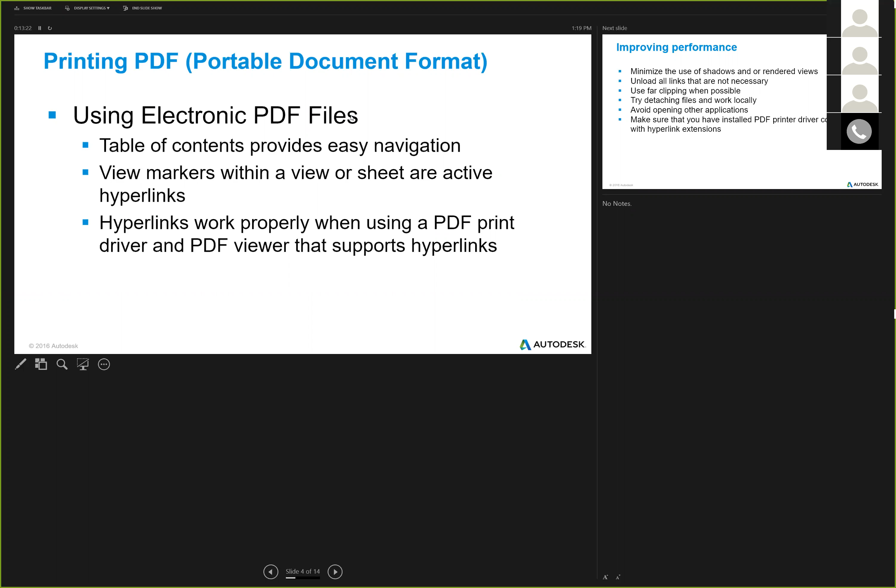To improve performance throughout the export of PDFs, you'll want to use a vectorized printout of the PDF rather than a raster printout. Not only for quality purposes, because if you do a vectorized printout you'll keep some of the information, but also the PDF becomes a searchable PDF.

When you have shadowed or fully colored views in Revit, Revit automatically converts that portion into a rasterized PDF. You want to unload links that are not necessary for the file, and also use far clipping when possible to minimize the information that's transferred or printed out to the PDF, rather than having the PDF print driver do the culling of the 3D model for you. You're actually doing it inside Revit.

You want to also detach files that don't pertain to the printing option, so the PDF print driver does not read through unnecessary files. This will enhance the exporting properties and make it quicker. Also, when doing export, I'd suggest avoiding opening other applications, because it diminishes a little bit of the production from the person exporting, but it will substantially eat up resources from your computer and slow down the process.

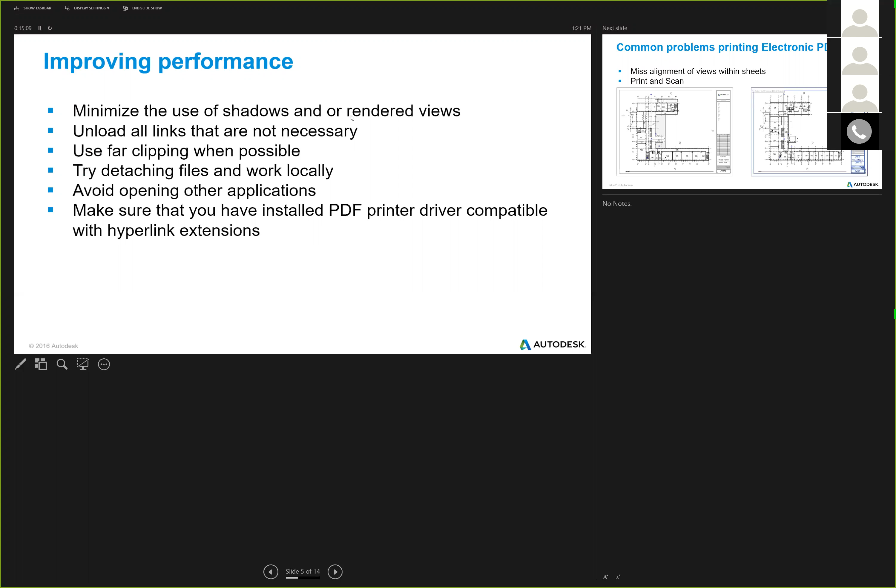If you're running Bluebeam and using the compare feature, sometimes it can automatically pick the alignment, but a lot of the time I had to use the 3-point alignment with Bluebeam, which becomes an issue when doing a batch comparison because you'll come up with a very huge array of results. The solution's not that complicated: if you set up ground rules and the architects and engineers coordinate a guide grid when producing their PDFs, they can align the grid lines to a specific coordinate within that guide grid in Revit.

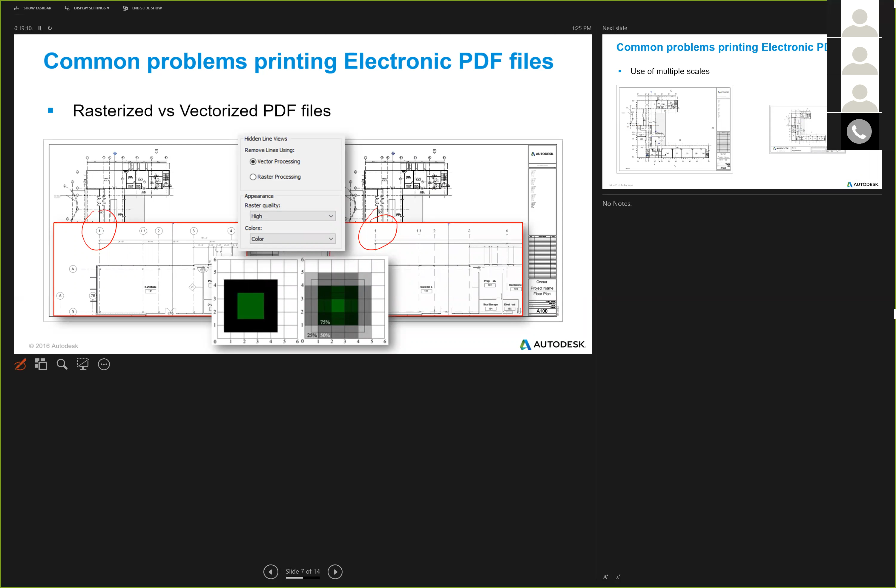Now here on the top, you've got the option when you're setting up your PDF print.

Ivan? Yes, sorry, can I ask a question? Why does anybody do raster then? What's the reason for it? Yeah, why is it even an option? If you want to rasterize the process? Yeah, like, if you're losing the quality, why would people want to do that? Does it enhance something else?

Usually I've seen this happening when they do renderings, when they have a lot of renderings on the PDF. Rather than going through Revit, doing the process to identify those renderings and rasterizing those portions, they rather rasterize the entire page.

Oh, so it's faster doing it with raster than vector. It's faster because you don't let the computer to try to identify the renderings inside the sheet, you rasterize everything. Make sense? Got it. That makes sense. Okay, cool. Thanks.

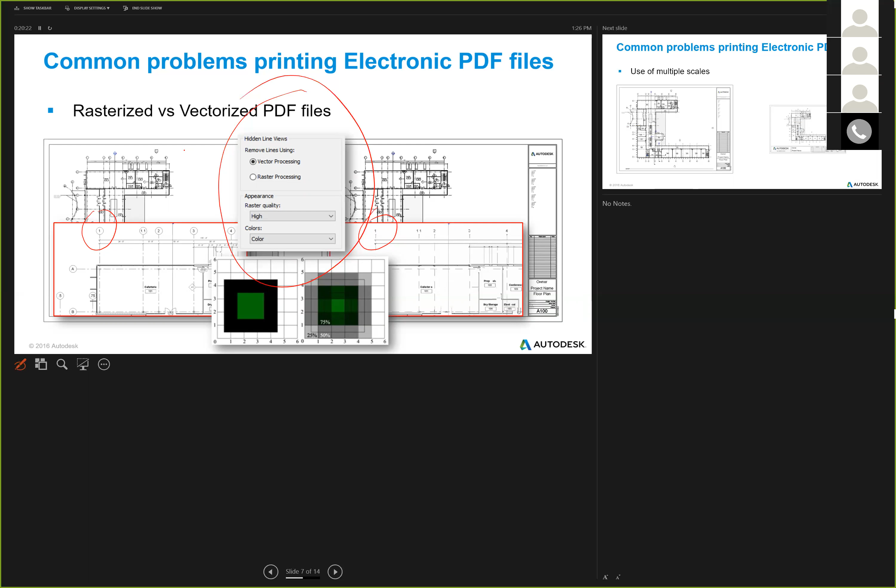All right. So another problem that I see happening, especially with subcontractors, when you're trying to do comparison, is that they tend to change the scale based on documents provided. Either they do a smaller sheet...

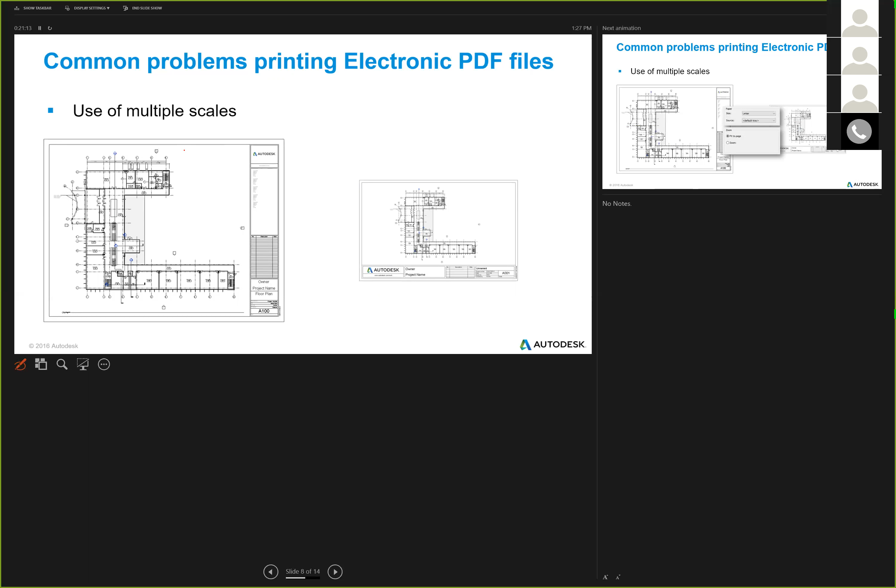You can actually fix this in the PDF reader writer by setting the scale of your drawings when doing comparison, but it loses its accuracy. Documents are not going to be set on the same grid, on the same coordinate on the page, which you will have to realign. And if you're doing a batch comparison, which is what you want to try to do in order to not waste time doing sheet by sheet, it diminishes the efficiency of the person doing this comparison.

So same thing, a lot of people, well this is back and forth, and this is probably things you don't want to see, people start using this fit page. And the reason for that is it's going to completely change the scale. You're going to have something where you're not going to be able to set an accurate scale on the page.

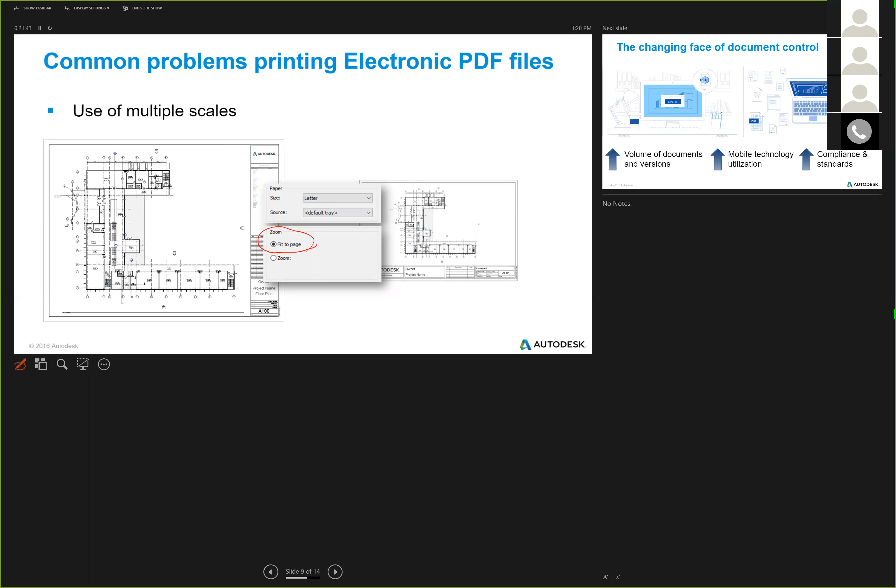All right, so let's discuss very briefly the changing face of document control. As you're aware, I don't know how many of you actually did paper documents back when everything was produced in paper and we didn't use PDF. You have the redundancy of printed documents, a huge number of sets, but eventually you had a little bit more control over what sets were printed. At some point, those sets were distributed through each party involved in the construction process. There was certainly a lag with regards to it, but now it's extremely easy to create sets.

You have a redundancy of documents. At the end of the day, a lot of the times when you're completing the project, it's hard to identify which is the valid set, or if you have a document that was issued, emailed, and it's not the most current version that you have on, let's say, your cloud server or on your local server where you're actually hosting the handover documents. So it becomes an issue, and I think you've experienced it.

Sometimes you have the final Revit file, or the final PDF file, or version 1, version 2, version 3, and you're trying to keep track based on a change in the name of the file that you're tracking. So that is a big issue.

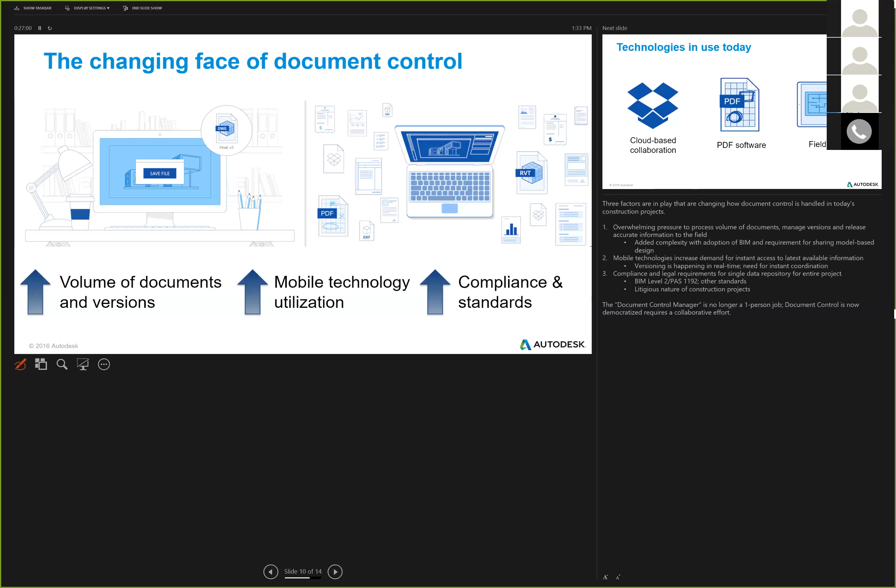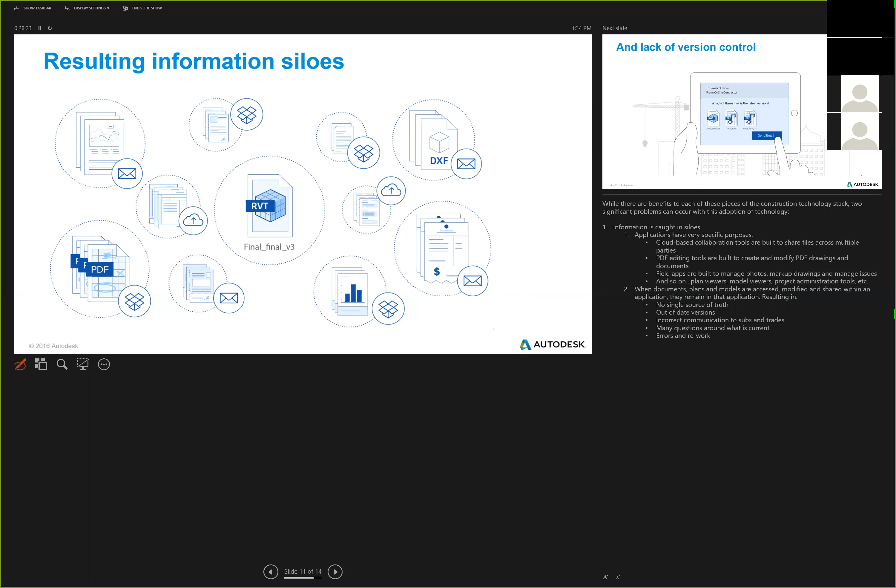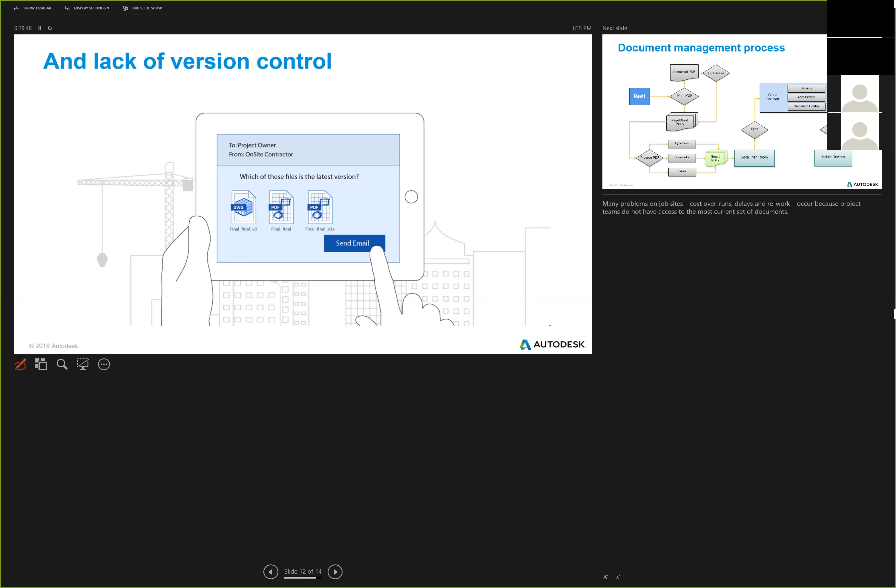So rather than having silos of paper that we had in storage rooms, now we're having silos of digital documents that are not truly interconnected, and you have a redundancy of documents that's becoming a true issue. As I mentioned before, one of the biggest challenges is being able to manage and control documents, the versions produced on every revision, who created the revised document, and when that revised document was produced. Now you have cloud services such as Egnyte or Box, which are actually able to manage and control those different versions.

I think I talked a little bit about what the issues are right now with regards to digital documents, and let me walk you through what we had at Balfour as a document management process. The process was initiated by the design firms when they produced PDF drawings from Revit.

And a lot of times, the PDF drawings that were produced were combined PDFs. Those combined PDFs were eventually exploded, and this was done by Balfour Beatty. We exploded the PDFs into single sheets, and from those single PDF sheets, all those PDFs were processed in order to hyperlink, to return some of the intelligence through doing batch hyperlinks. We used Bluebeam at that point, and Bluebeam had a great tool to do hyperlinks.

We generated bookmarks and labels to be able to connect all those sheets together. After we went through that entire process, we created what we at that point called smart PDFs. And from those smart PDFs, we loaded those PDFs to our local plan room, which eventually synced up to the cloud. And the cloud needed to provide certain features. And eventually, that cloud also provided access to sync those documents to mobile devices.

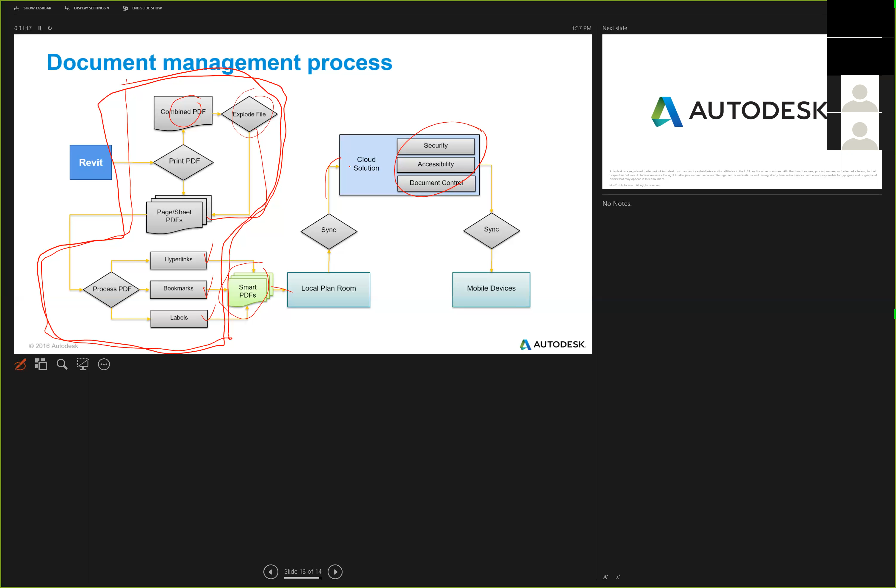So you can see every time you add a process, that process is prone to errors, and it did happen at one point or another. It was efficient, it was effective, but this was time consuming. So let me go through what I'd like to show you with Revit, with the R15 revised. Well, right now I'm running the R17, but it has the same features and capabilities.

When you print out a PDF from Revit, what you want to make sure is that you have the proper PDF printers. In this case, I have the Adobe PDF printer and the Bluebeam PDF printer set up here. Both are very capable of printing your documents with hyperlinks. So you don't have to go through the process of hyperlinking documents over again.

Now, it's also important to understand that there's also CutePDF that you can download, and it will also produce hyperlinked documents. But it's also important to understand that not every PDF reader/writer is capable of reading those hyperlinks. Adobe and Bluebeam, they do a very good job reading those hyperlinks.

In the case of Adobe, if you generate a hyperlink to map the document back to your computer or to your local drive, Adobe does read the file colon and the address that you're mapping within your drive. Unfortunately, for some reason, I wasn't successful doing that mapping through Bluebeam. It did not recognize the file colon and the address where the file was located on your local drive.

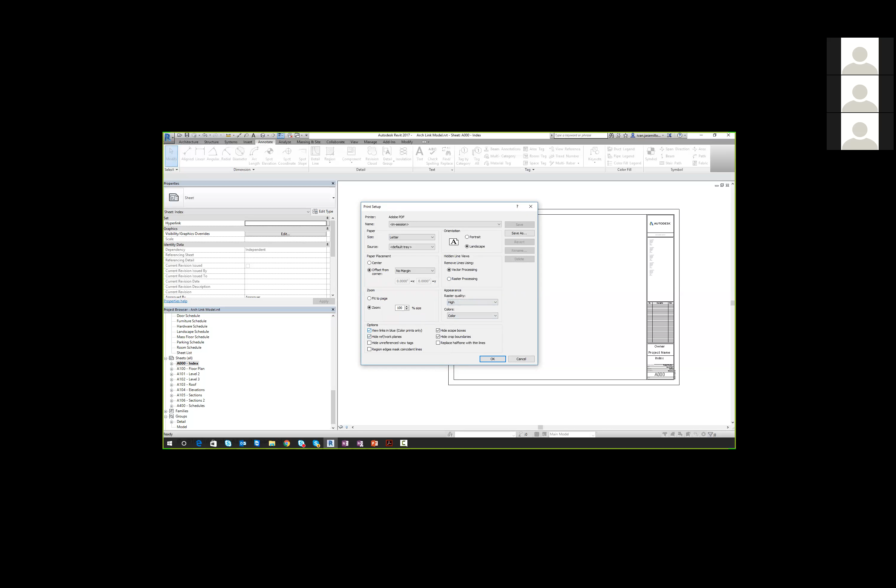And what I usually do, or usually did, is I enable this link. It's usually always turned off. It's view links in blue. It helps out identifying where you have those hyperlinks on the sheets. It makes it easier for navigation. All right. So I'm not going to export it here. I already had it exported. That way I don't waste your time waiting for this to process.

All right, so before I move out from Revit, let me very quickly show you, when you are organizing your drawings or your layout on a sheet, right? You want to make sure that, where's my, here. That either you create or generate a grid that you're going to use as a reference to be able to locate your file. And if the architect provides the same grid to their engineers, then everybody can use that grid to align specific grid lines.

And the purpose of this is that when you're doing sheet comparison, you can actually do a sheet comparison or an overlay of sheets with your architects, your structural engineer, and your MEP guys. And this becomes extremely important, not only to be able to coordinate with those different stakeholders, but also to better understand if you're looking at mechanical versus structural, and you're able to overlay both with different colors. You're going to see that in some cases you might find differences based on the level of completion of each one of those different releases.

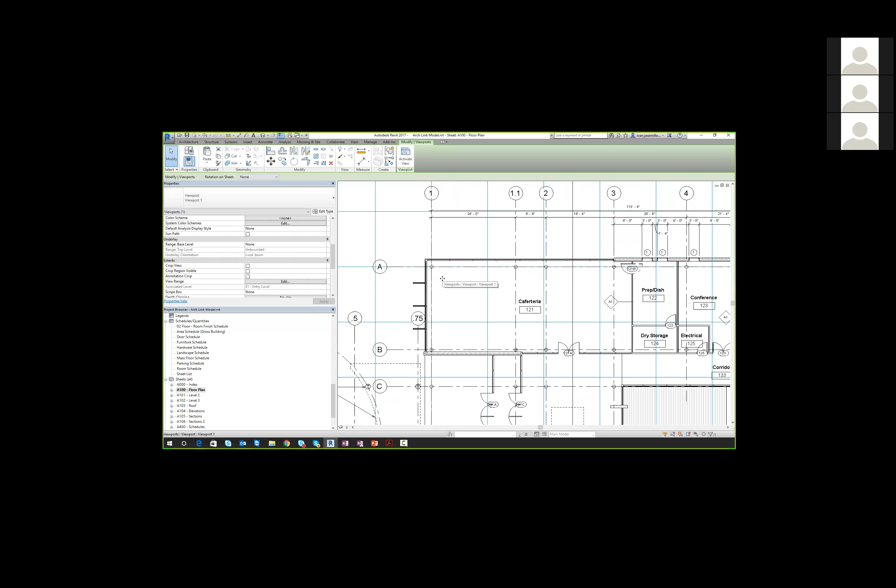And you'll find that sometimes the MEP engineer has a version that's a lot more updated than the structural engineer based on changes from the architect. Let's say they shifted a column and you don't see that column shifted on the structural side. It does happen. I've seen those cases where you have a more complete file from the mechanical engineer than from structural. So it's extremely helpful if you can coordinate with all of them to have the same base coordinate for drawings.

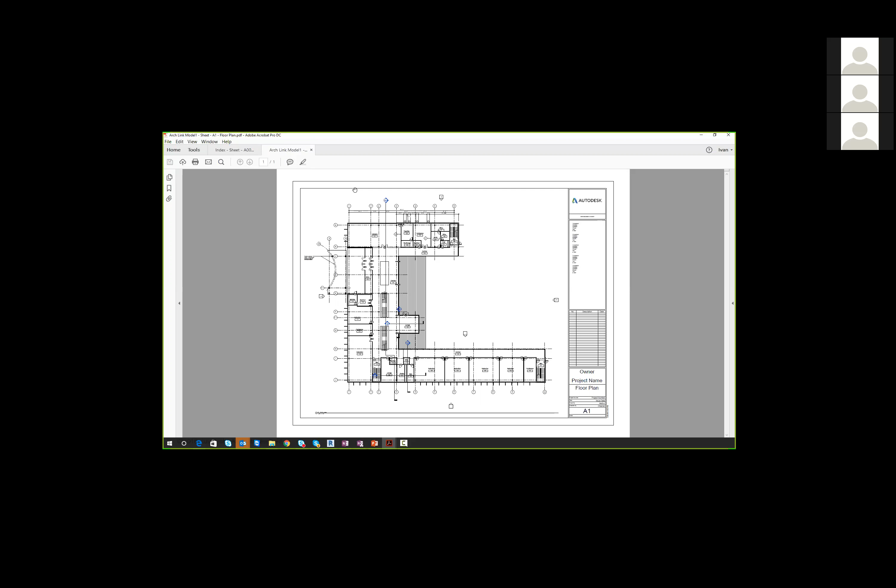So let me move into the PDF. All right, so this is exactly what I printed directly from Revit. I didn't do any changes or modifications, didn't go through a hyperlink process, I did a direct printout. And if you look at it, all those hyperlinks are active. It was generated directly from Revit. And if I click on each one of those, the hyperlinks are mapped back to the pages where they're created.

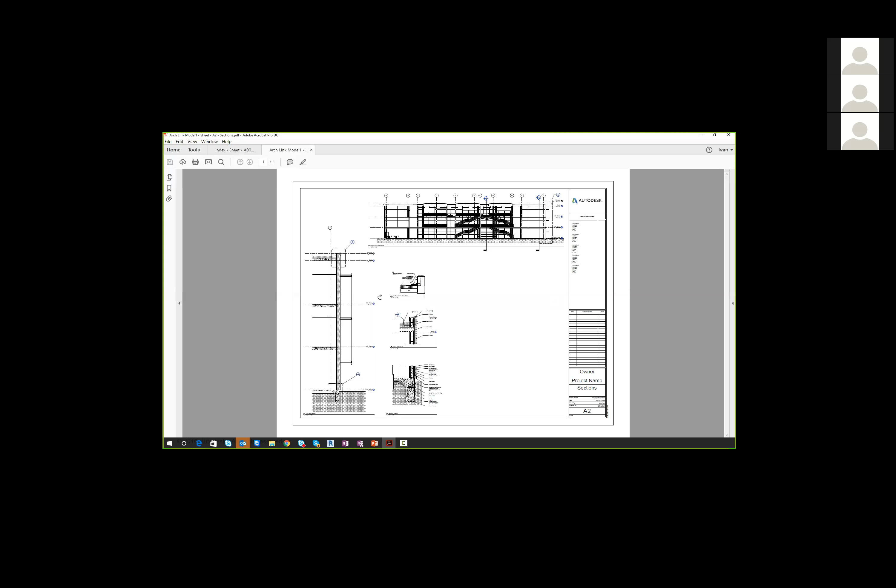And another thing, when you do the hyperlinking through Bluebeam or a PDF reader writer, or even through Adobe, I've in some cases used SmartUse that does the automated process of generating those hyperlinks. This does not create these hyperlinks over here, right? This was everything created directly through Revit, which makes it easier to navigate. Let's see. I'm sorry.

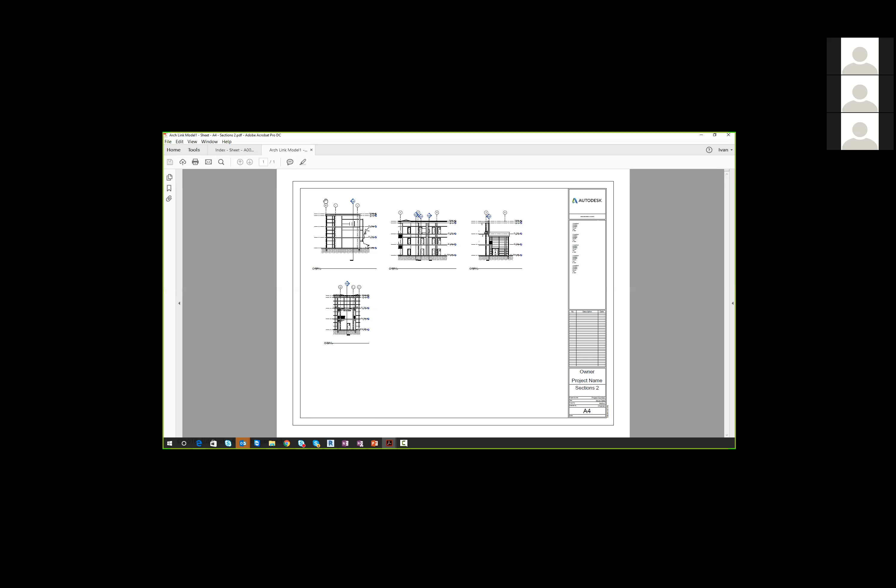Now, same thing with the index. Let me open up the index sheet. This is also a very short example that I wanted to show you. Through Revit, if you look at this, this was created as a property inside Revit. You can actually shorten and automate the process of generating these hyperlinks. In this case, I just did a copy paste of the hyperlink directly from the cloud service that I was using. In this case, I was using OneDrive. These hyperlinks were created through Revit, and when exported to PDF, it retains those hyperlinks. And this is the same thing.

Unfortunately, for some reason, this is something that I didn't find to work on Bluebeam. It does not recognize this type of link. On the other hand, Adobe does recognize this as a link. So if I click on any of this, all right, let me move this. It appeared on the different screen, so let me grab this so I can show you. So it's going directly to the cloud service, and it's searching for that sheet, and it opens that sheet directly.

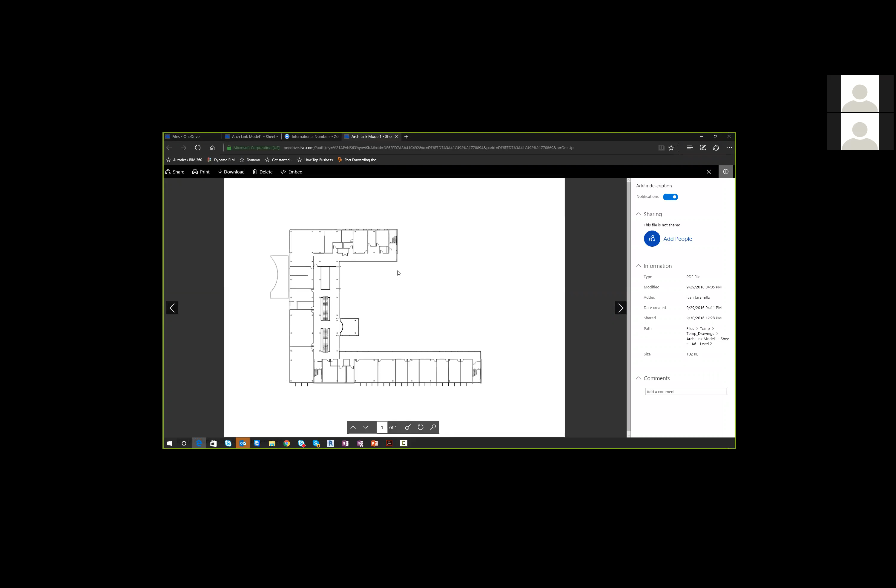So if you're using a specific cloud service, you can generate those hyperlinks, provide access to it, with a password if you want to set one up, and that link can guide you directly to where those hyperlinks are.

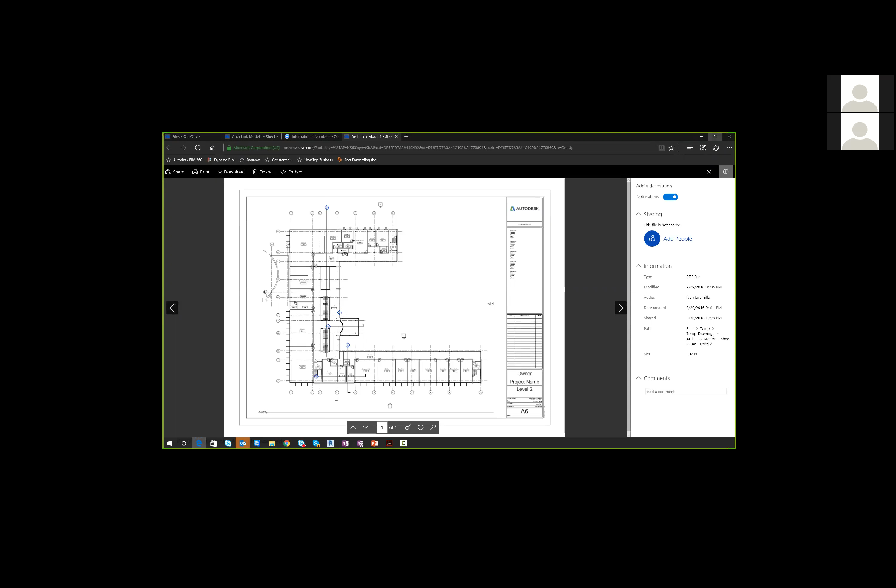All right, let me see if I have anything else to show you guys. Are there any questions or anything else that you guys would like me to cover? I know that part of the discussion was the creation or the export. In fact, let me switch back to Revit for a second. The export as a DWG file.

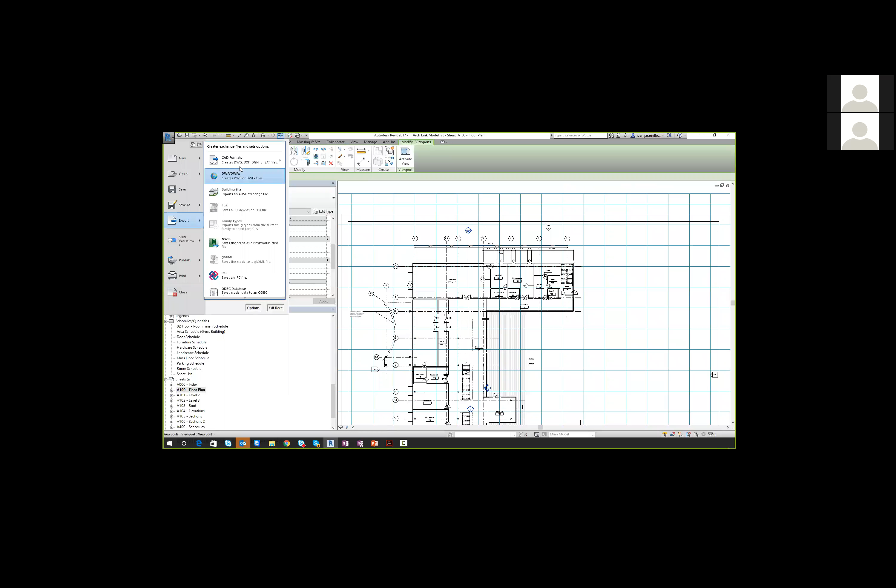All right. Don't save.

Okay. When you export as a DWG file, you're able to set up the layers on how you want to export. And based on those layers, when you do a print through AutoCAD, then you can control layers. But as you see, Revit manages categories. And inside those categories, it manages different families. So you can convert those categories into layers by setting up your layers if you want to turn on and turn off layers.

I don't know of any other way of doing this rather than exporting directly from a DWG. But at the same time, I never had the instance where I actually required or needed to use layers inside the PDF reader writer. Yeah, it can be a very valuable tool for people, Ivan, to be able to use layers. And I don't really want layers per se.

I mean, just like when you create a 3D PDF, you can use the navigator, for example, in Bluebeam, and you can turn off walls, you can turn off doors, you can turn off any type of component that Revit pushes out. And I'm looking for some type of functionality directly out of Revit like that. It doesn't have to go to layers. I don't really want layers anyway.

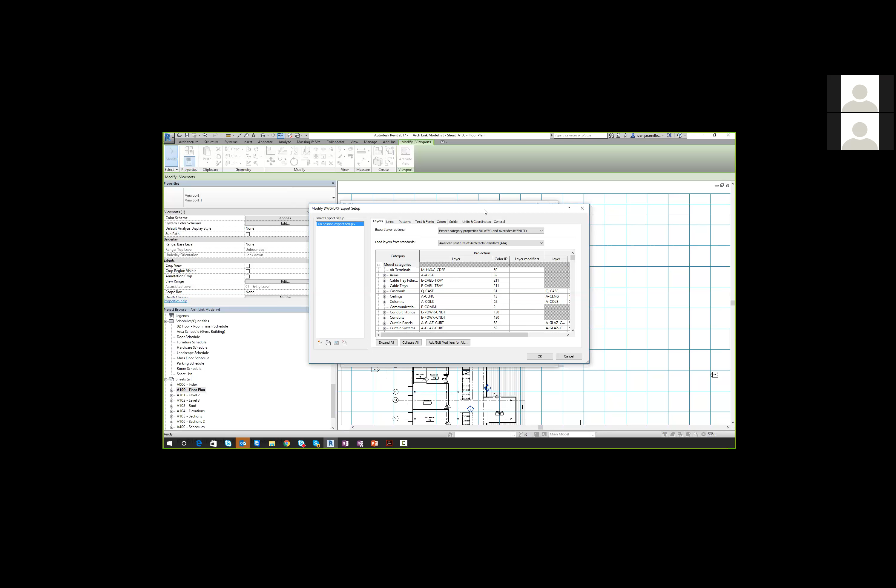I haven't found any changes. I think the capabilities for the export of PDF with hyperlinks was actually released in 2015, the second release. So Revit 2015 R2 came with the activation of hyperlinks. Yeah, we had been making a huge push for it in the PDF coalition. Matter of fact, Terry Ann, you may be able to remember when we started commenting about it.

I can't remember how fast it went up the AUGI list of wants from people. It was rather far down, and then when a lot of us on the PDF coalition started pushing for it and getting other people to vote for it, it moved up the list pretty quickly. So that was a great new feature. I remember when it came out and released too.

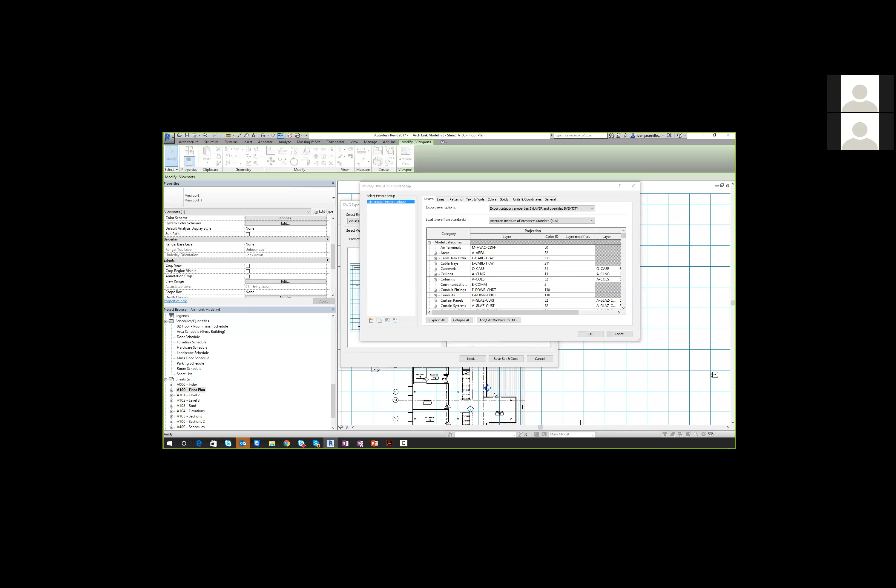Yes, actually, it makes a lot of sense, because if you look at this process and everything you need to do to be able to generate a smart PDF that's actually usable for construction purposes, it's not only the amount of work that you have to perform, but it's the time consumed by the person creating it and the time lost by the person expecting to receive those smart PDFs to be able to work with them. So at least being able to generate those automated hyperlinks directly when you export from Revit, it's big. It saves a lot of time.